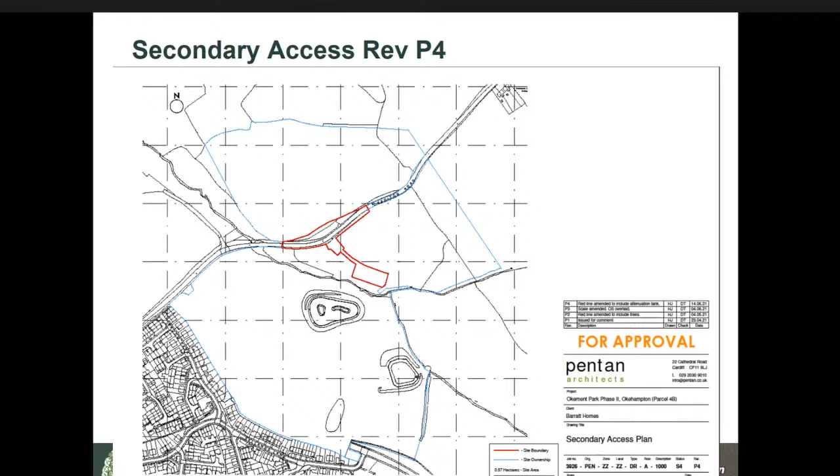So in slightly more detail, this is the proposed access point. For those who know the site well, the approved access point is further up the hill towards the pair of semi-detached properties, going out towards North Tawton. This secondary proposed access is further down towards Brightley Stream and the new roundabout that's been put in recently.

So there you can see the stream and its associated trees coming in here, the access point and the splays required, and the drainage system associated with that.

This plan just shows the location of the two accesses in relationship to one another. This more northeasterly access was the one already approved in relation to the outline permission, and this is the southerly, or westerly, access that's now being proposed and is before members today for consideration.

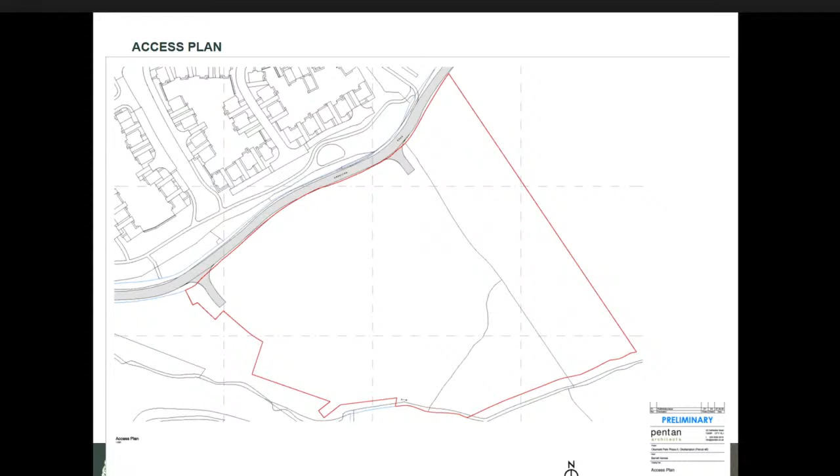These plans were requested by members to be shown at committee so you can see the context. So this is essentially the whole of the TTB 14 allocation - this is parcel 3 here, and 4, with 4A here and 4B here.

I would stress this is an indicative layout that was approved at outline stage. So the actual physical layout that's been approved, or that potentially can be achieved, doesn't bear resemblance to this - this was just the outline scheme showing the idea of development of the site. As you can see, there's an access shown here, but at that point no vehicular access shown to the south. This is how the sites relate to one another in terms of development out of that area to the east of Okehampton.

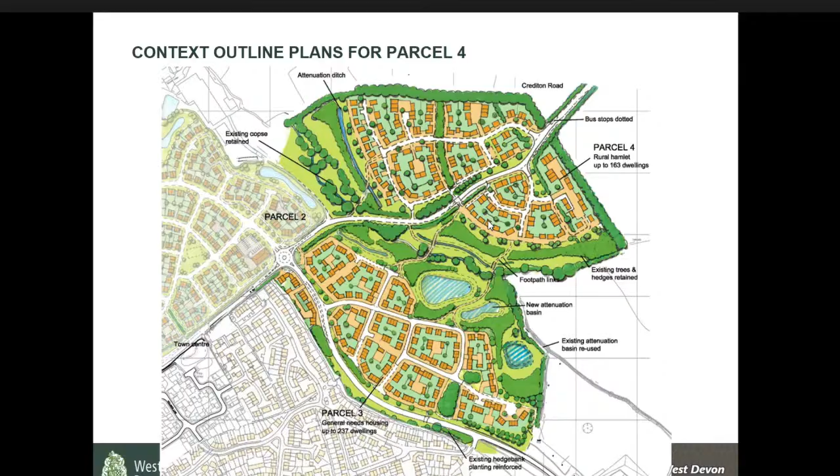As I've said, this would be the second vehicular access to serve 4B, the first being approved at outline stage.

There are several considerations, but the principal issues with this proposal are the impact of the access on ecology, landscape and the visual entrance to the site and the town itself, versus the adverse landscape impacts and poor urban design that would likely result from only a single access into this site.

It's likely that a single access into this site would also lead to a reduction in the quantum of housing achievable within the 4B site, due to the topography and constraints of the site and the way it would have to be developed out with only a single vehicular access.

That in turn is likely to affect the viability of the site, which, for members' benefit and as a reminder, wasn't fully viable at policy levels when it went through outline stage - it achieved only 20% affordable housing contribution, predominantly because of the large payments required from these sites towards the infrastructure of the primary school and the link road.

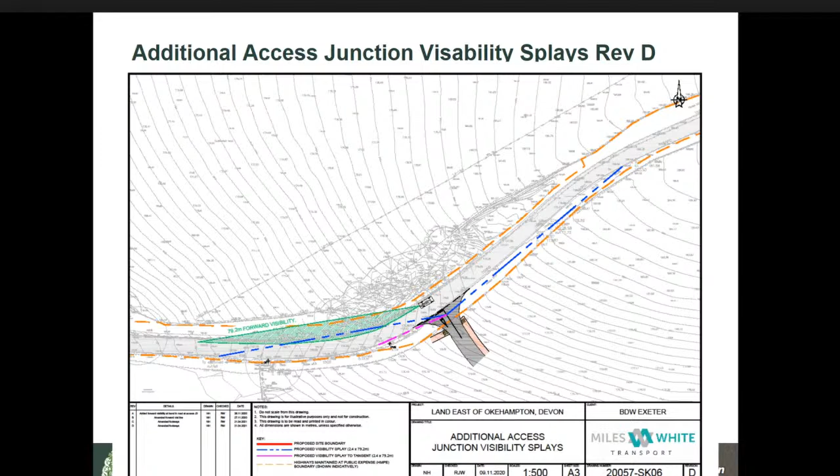Certainly, Chair. Yes, Councillor Basham, those discussions have been ongoing. I'm afraid it's just because of the lead-in time for writing reports to the committee, but those conversations and liaison with the developers have been ongoing. The update we've now had from the lead local flood authority is that they've got no objections subject to conditions, and the conditions they've required can be covered within the generic drainage condition recommended on page 8.

So they've now removed their objection and they're comfortable with the scheme subject to conditions. They're pretty standard conditions - details of construction, details of exceedance flows, how the flood system will be managed and maintained. They're the standard conditions I would expect to see once they're happy with the overall scheme.

Thank you. Can I just have a supplementary on that, Chair? Yes, would those plans affect the number of houses on that particular site? I notice there's a pond going in there, which there is proposed housing to go over the top of.

Through you, Chair, sorry for my answer - if that reference was to the indicative layout plan I showed, that was just an indicative plan put in at outline quite some years ago, just to show potential arrangement of the site. The drainage scheme that's proposed now, as far as I'm aware, wouldn't affect the quantum. It was always anticipated the site would need a certain amount of infrastructure, whether that's below-ground attenuation tanks or the SuDS scheme above ground. So there's no implication for the quantum based on the SuDS scheme proposed now.

Can I ask you to put up the larger overall map please? A bit more than that if you can. You had a map that shows Hitchcock Cross. I think it was the first one actually. Oh, that was it.

You see the crossroads at the top of the plan there, Councillor Pearce, the one at the top of the hill, which is where the character of the road changes as you come into Okehampton down the hill. The 40 will apply from that crossroads down to the new roundabout, where it will change to 30. Right, okay, that's fine.

Thank you very much, because that road is very dangerous in the wintertime when the road is wet and the angle of the sun shines through. So even though there's going to be a significant splay put in if this application is approved, there will still be a curve there which will create a blind spot as one comes around that part of the road coming down the hill.

The visibility splays to be provided, as shown on the plans, comply with the speed limit. You'll be pleased to hear, Councillor Pearce, I totally agree with you about the suitability of that road for a 40-mile-an-hour speed limit, and I was instrumental in getting it changed to 40 in spite of the fact that it might not strictly comply with county policy.

Right, and the 30 then starts at the roundabout, you say? Through you, Chair, it starts just before the roundabout, on the approach, about where the cursor is now, possibly a little further northeast, just after you come round the bend. Okay, thank you very much.

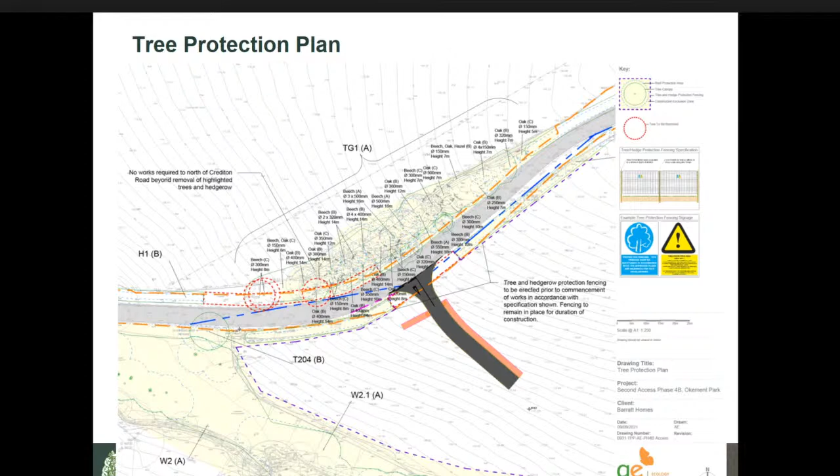I just wondered whether that will allow for more houses, or if there's not a continuous road on the whole land - if this is approved today, any effect made by this new entrance going ahead - because I was on the committee when we did the outline permission, with the indicative site. So any houses lost close to the road where this entrance goes in, can that be made up if we don't have a through road on the estate or development as a whole? So are you looking at not having a continuous road? I think one of the members brought it up earlier, actually - you won't have a through road. Is that something you will consider when you come forward with reserved matters plans?

Just to answer that, as far as the design has got at the moment, as Anna was saying earlier, it's not planned that there'll be a through road, and that goes back to the point that it's not really possible due to big engineering constraints. So no, I would say no. Right, okay, fine, thank you.

Any more questions, Councillor Cheadle? If we think of this as two proposals, one with a single access, one with a double access, does the housing density change as a result of the decision we make today? In terms of density, if we were to continue on with a single access, that would reduce the number of units. It'd be a less dense development overall.

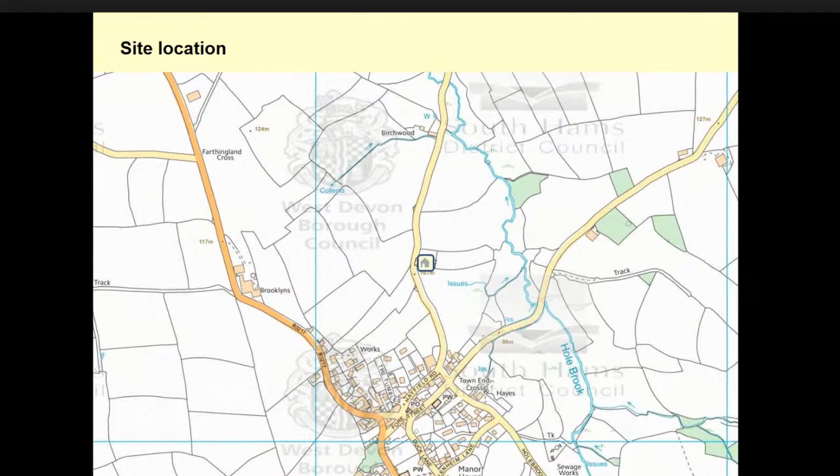So it's agricultural land, north of Exbourne. For the purposes of JLP policy, it's in a countryside location. The site is around 300 metres north of Exbourne and is accessed via a country lane via Hayfield Road. The application site is around 50 metres long, 25 metres in width. It has the existing stable block located on its southern edge. The existing access is Hayfield Road to the south-west of the site. The existing barn was approved in 2002.

There are a couple of restrictive conditions of relevance to mention in relation to that: that the permission shall inure for the benefit of the applicant only and shall not inure for the benefit of the land, and also that the building as approved shall be removed if within 10 years from construction the agricultural use of the building ceases.

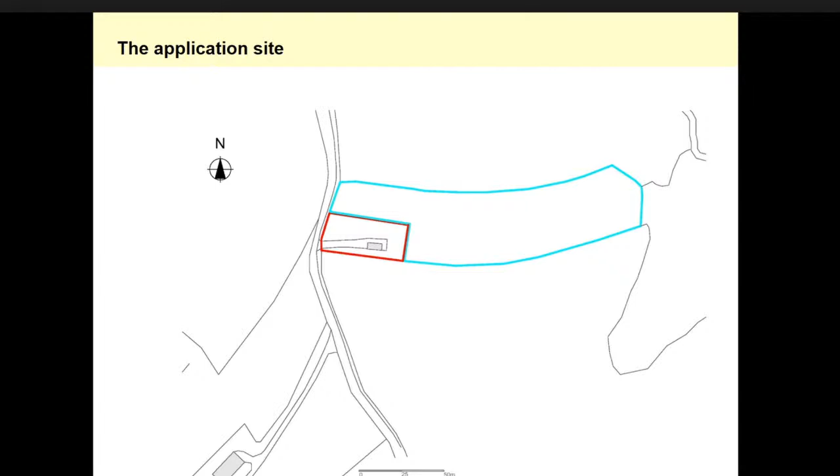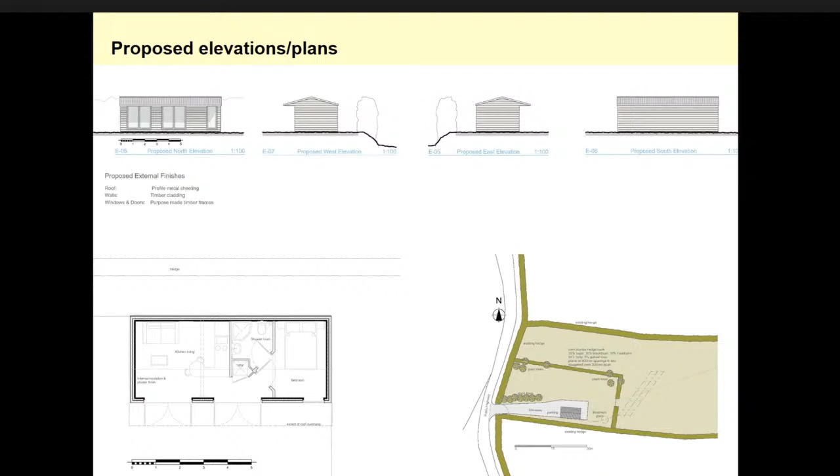You can see the proposed elevations here and plans. There is no increase in size or footprint of the stable block. It effectively infills existing openings with glazing, and consists of a kitchen, diner, living space, and a double bedroom en suite. The site plan consists of segregating the southwest parts of the existing field around the stables, so that it utilises the existing access, and it will be divided using a number of new hedge banks. Drainage is proposed via a soakaway and foul drainage via a package treatment plant.

In terms of the principle of development, although Exbourne is recognised as a sustainable village in the third level of the settlement hierarchy, the site is neither within nor on the edge of the built-up area, and therefore the site represents development in the countryside. In relation to TTV 26, proposals do not respond to a proven agricultural need or occupation that requires a countryside location, and the proposals conflict with TTV 26 in this respect.

As it proposes use for holiday accommodation, policy Dev 15 is of relevance, supporting the rural economy. This does provide some support for chalet and tourist accommodation, provided it is in a suitable location. As I've said, this is in a countryside location, an unsustainable location, and doesn't have support from policy TTV 26.

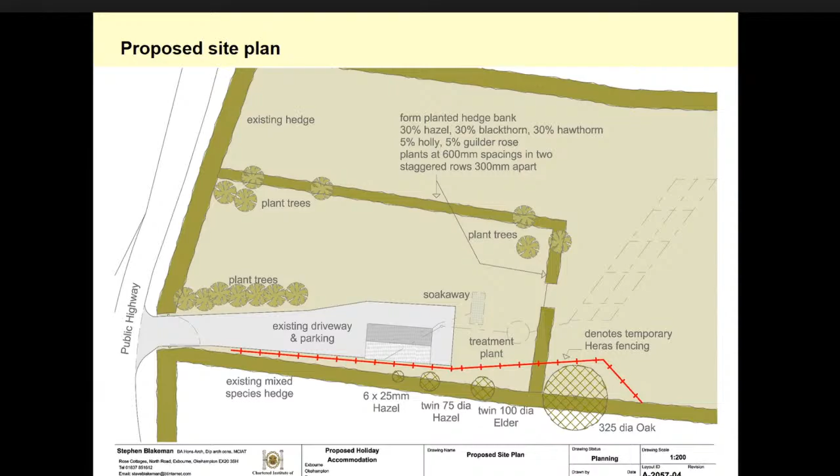So in summary, the application is recommended for refusal, of relevance to the unsustainability of this location. It introduces a self-contained holiday let into a countryside location. It does not fall within or on the edge of the built-up area of Exbourne, and the proposal is neither in a suitable location nor has suitable justification that it responds to identified local need. There's also concern over the precedent for further holiday accommodation, further development on the site, if this application was to be permitted.

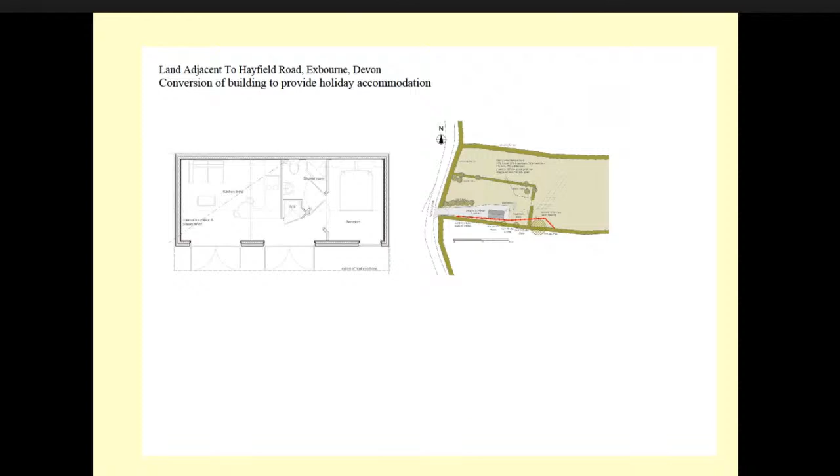The application was submitted in August last year, and we've had two planning officers dealing with it. On the 22nd of October, we were told that the planning officer could support this application, by email. Then in January this year, David was appointed as the new case officer and he again was supportive of this application, until my understanding is powers from above suggested it should be refused because it's 300 metres from the village, and 300 metres is considered to be an unsustainable location.

I wonder about the new housing that we were discussing before this on the edge of Okehampton, whether that is more or less than 300 metres from facilities.

I would suggest it probably is a lot further than that, and with some steep hills between. Can we have the next? Oh yeah, there we go.

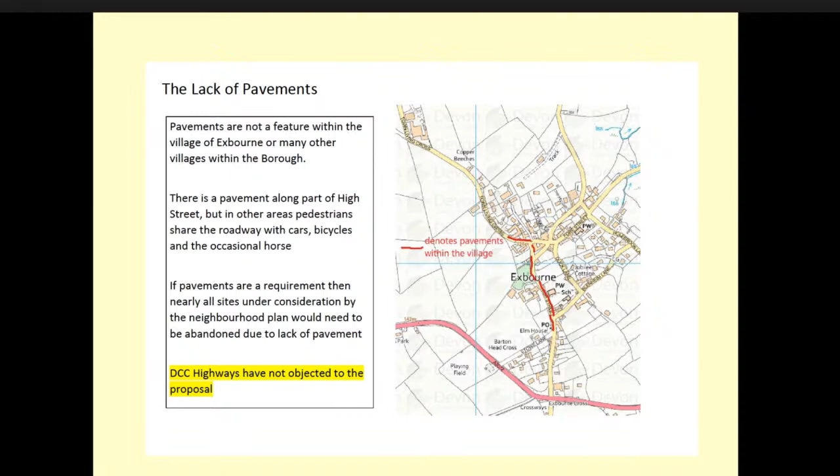We could go to the next slide, please. There's a couple of applications worth mentioning. First, on section 7 of your agenda today, there's an application for 17 units at Patchacott, about 3 miles from the nearest facilities, where you're at one stage going to be recommended to approve. There's also an appeal at the Countryman Inn, again several miles from anything, for holiday accommodation, which the appeal inspector approved. If we could go to the next slide, please, quickly. Sorry, I'm afraid your time is up. Could I just stop? I'm sorry, you do need to stop, sorry, thank you.

I will open it up to see, well, I will ask a question. No, Councillor Morris, over to you. Thank you. Yes, presumably if people are bringing horses there, they come in a trailer or whatever. But is there any riding other than along lanes? Is there any woodland close by, or presumably no moorland?

Well, riding is only part of the application. The applicant offers riding because they've got some land suitable for that. If people do bring their horses, they'll bring them in a trailer, and won't need additional buildings, which was a concern of the officer. But mainly, I'd suggest this will be used by people with dogs going on holiday. People like me have a dog, my partner won't go anywhere if we can't take the dog. So facilities like this are more likely to be used by people going on holiday with their dogs than with their horses. That was part of the application mentioned in the design statement.

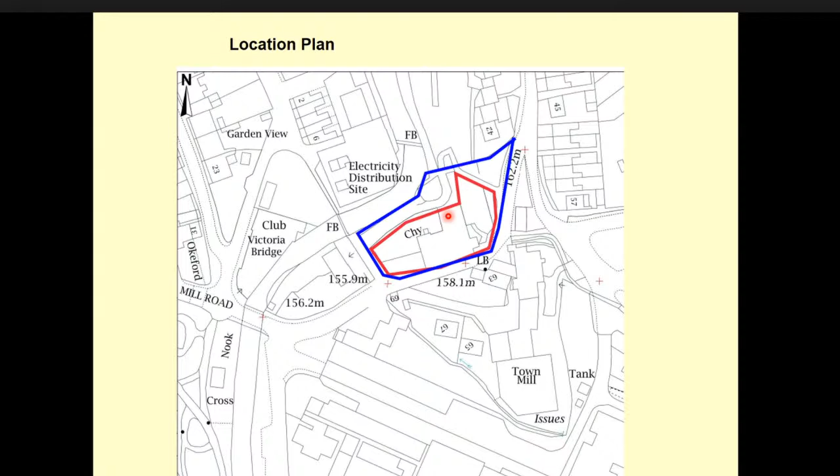This report is very comprehensive and sets out the competing issues regarding the circumstances of the site, its town centre location, potential harm to the public, the benefits the building has at the moment, and the policy situation in terms of the NPPF, our SPD, and policy guidance around demolition of heritage buildings. So I won't rehearse those issues, as they are set out in a lot of detail within the report.

We'll take you through the plans and photographs for those less familiar with the site. That's the site in the centre of Okehampton. As you can see, the buildings will be demolished. In addition, there is the listed chimney and the listed bridge just to the west of the site, and Town Mill to the right, to the east of the site, on the other side of Mill Road.

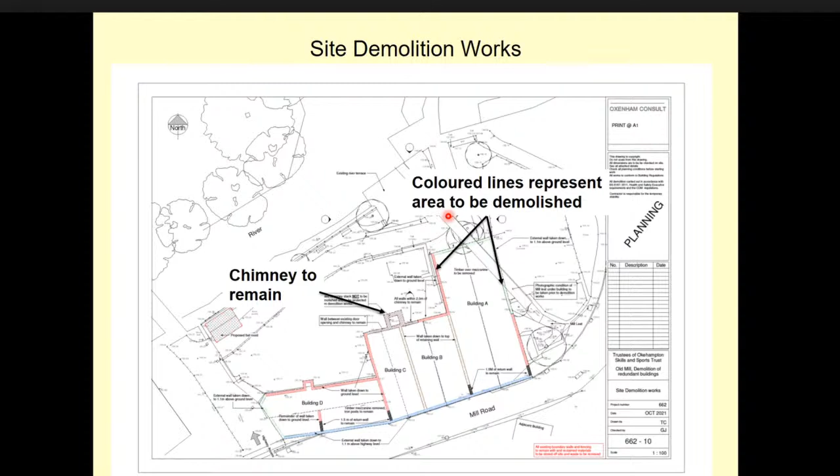Here you can see the buildings in the areas to be demolished. The chimney remains, along with what would essentially end up being two buttress sections of wall. There isn't a concern, we've been advised, about the structural integrity of the chimney, but in order to play it safe, two sections of wall attached to the chimney are proposed to be retained.